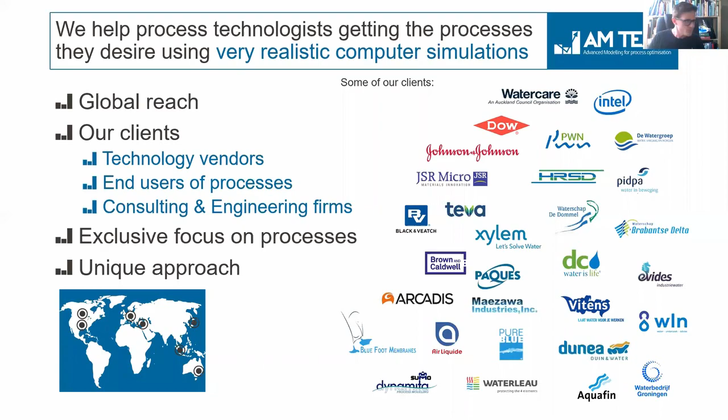You will for sure be familiar with some of the logos on this slide. Others are maybe more unknown, but you can see it's a whole variety of companies that we work with. You can also see on the little map in the left-hand corner that our customers are really from all over the world. We are actually serving people from 4 continents right now, so it's quite international because of the core focus on process simulation.

So we are very good at computational fluid dynamics, but really dedicated to the water industry or process side. And this really is quite unique.

Okay, so last slide on the company, I promised to really keep this short. We have around somewhat more than 50 customers right now, more than 80 projects finished in the meantime. Generally our customers are really happy. These are the average scores of our customers in the last 2 years from all the projects we have finished, and it's consistently close to 90 or above 90%, 9 out of 10, which is great to see.

But again, we have a huge amount of information on our website. So this was all on the introduction of AM Team.

My personal background is process technology, process modeling, drinking water and wastewater. I have worked on both, and I have a special specialism, a PhD in advanced oxidation processes for micropollutant removal. But generally it's physical, chemical, and biological wastewater and drinking water treatment.

What are the challenges you might face with process operation, design and scale up? If you look at the water or wastewater treatment process, or actually a treatment or production process in general, you have a lot of challenges as an engineer. Most of us here attending are engineers.

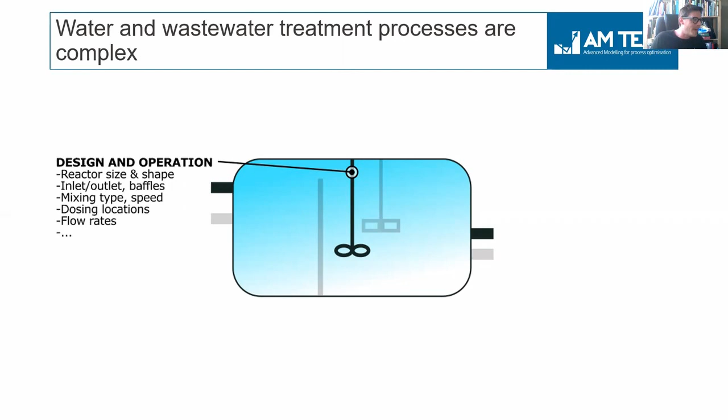But you have to make a lot of decisions: shape of reactors, impellers, and then you have water, you have bubbles, you have particles or solids, and then you have reactions. All of these things are actually combined in most of the water and wastewater treatment processes. Not all of them, but let's say it's a mixture of them, and it leads to highly complex processes.

And then we have combined with that dynamics - the demand or flow rates also change. So if we look at the operational side, a plant also varies in capacity. So there is a huge challenge here.

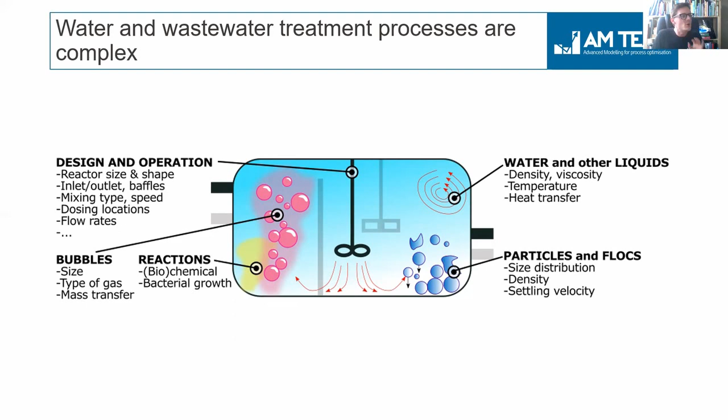And the question we want to actually solve with our company - and we have done a lot of cases on this for customers in the industry - is: what if we could reduce, complement, or replace real life experimenting and piloting with a very realistic process simulation? And I specifically mean computational fluid dynamics.

Well, why is this question very relevant today? And why is your attendance today a bit more relevant than, let's say, 10 years ago? Because CFD, or computational fluid dynamics, or modeling in general, has matured a lot in the last decade. Computers are very fast now and the models have been developed a lot. And there are, of course, also a lot of practical case examples that just show the benefits already.

This is a very relevant question. Why? Because if you are involved in practical testing, practical measuring, experimenting on site, piloting, you know that it's very time-taking, it is very laborious, it is sometimes stressful, and it costs a lot of money. I'm not saying that it is useless, and it can be very useful.

On the other hand, what I'm saying is, what if you could replace part of that, and in some cases almost all of it, by very realistic simulation?

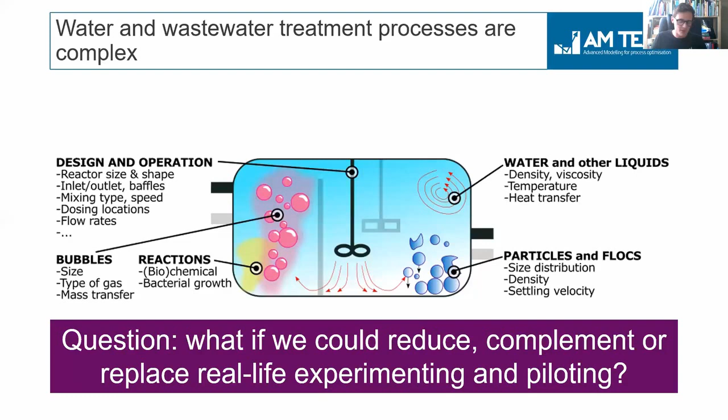Well, it's worth asking this question. It's really worth asking because it's about a lot of time and money.

So you have the 3D conversions of something. It can be oxidation, biological conversion, bacterial regrowth. These kinetics can be directly coupled with CFD, which gives a lot of insights. And then you have the process settings: viscosity, temperature, reactor dynamics, reactors, impellers, etc.

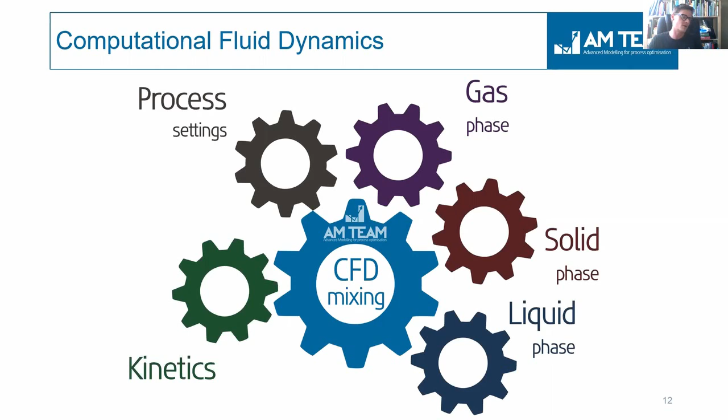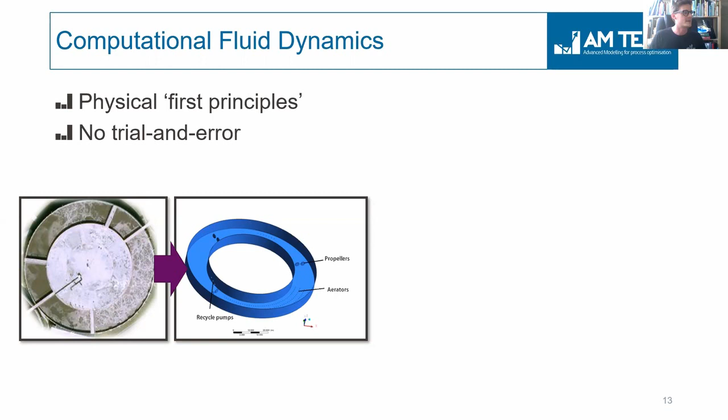So what is CFD? Well, you start from a real system, or a system you want to build, so it shouldn't be existing yet. The first step in CFD is you build a geometry, we call this the 3D geometry. It's somewhat more simple than a real CAD drawing, but it contains the real essential elements, like impellers, mixers, aerators if you have them, the real size of the system, the real flow rates, etc. So this is what we start to build, and then this is what we call the meshing. I'm just explaining on this one slide what CFD basically means.

We will not go into detail, but then we do the meshing, and you divide the whole domain. So if you, for example, have a reactor of 1 million liters or 1 million cubic meters, we have actually simulated big systems as well, and you divide it into 1 million cells. On average, the cell size is then 1 liter or 1 cubic meter. So it's high resolution modeling.

In each of these cells, you solve physical equations, and this leads to a very detailed hydrodynamic calculation, because all the cells will calculate mass balances, and you get very nice plots coming out, which most people are familiar with, the colorful drawings. So CFD, that's a bit the power.

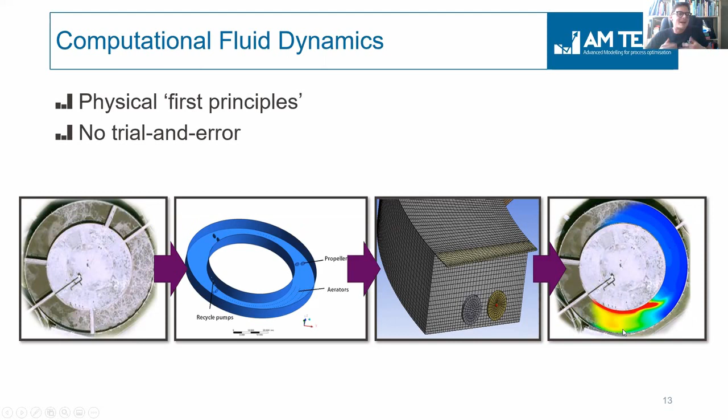It visualizes nicely, in this case for example, where the bubbles are. This red zone you see here is a concentration of bubbles in an aerated zone, or oxygen. And you have in the aerated zone other zones with fewer bubbles in this case. But it can also be velocity, velocity gradients, or different things. I will come back to that.

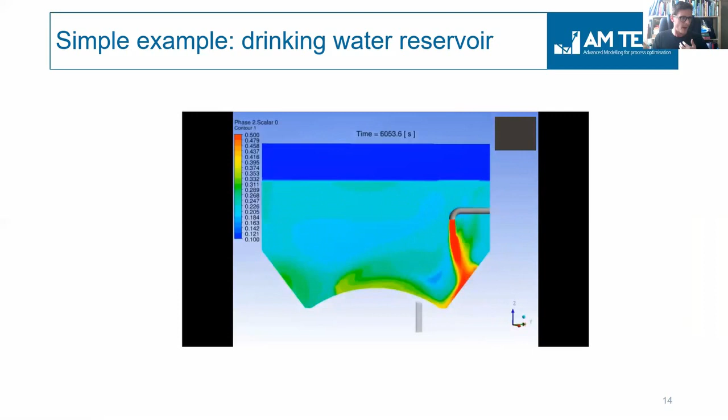A very simple example, this is from the drinking water field. You have a reservoir, we fill it with some drinking water. This is a drinking water storage system. You don't want the drinking water to be aging, because there is a potential risk of bacterial regrowth. So it's all about risk minimization.

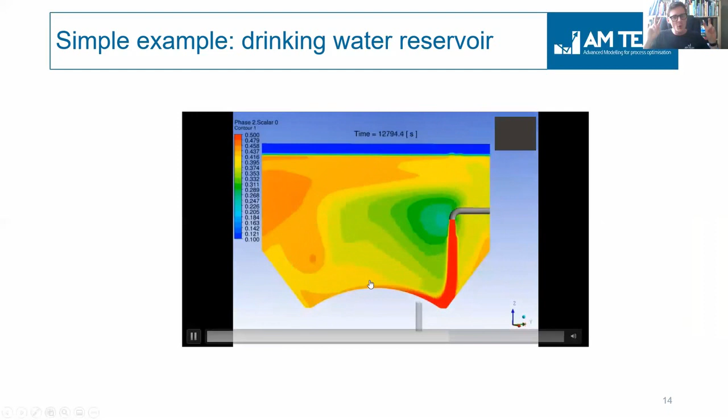You can nicely visualize how the newer water that comes in mixes with the older water. At the end, if you cut the water tower, this water reservoir, into slices, these are horizontal slices at different depths, you can see the green zones, which are actually the older water from the day before that is still in there and not completely mixed with the new water.

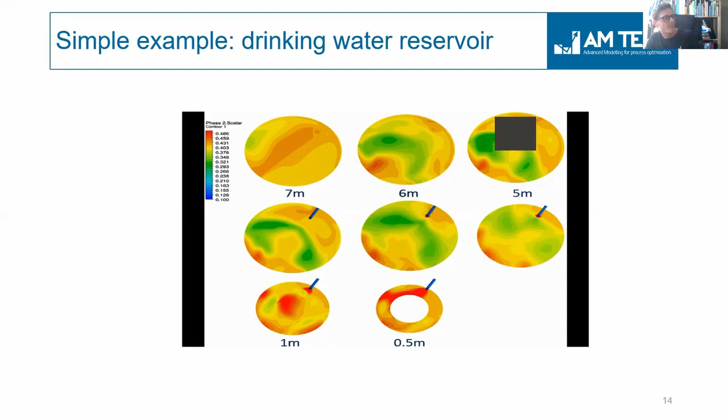Very simple system, but the value of CFD is that you can do what-if scenario testing. So what if, for example, in this system we would make this pipe a bit longer? What if we put it a bit deeper? Would it improve the system? But you don't have to do this in practice, because it's not feasible in many cases at full scale, and secondly it costs you a lot of money and you still don't know if it will work.

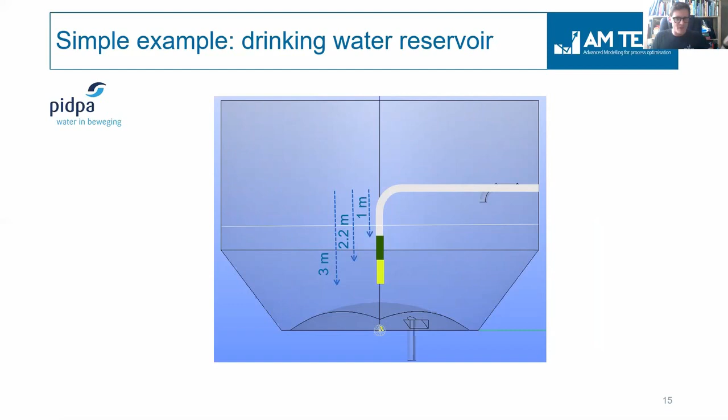So you can first simulate it, and let's simulate it. Then you can see, for example, that the new design is much better. This is the new design with a central filling, it's just changing a filling pipe. And then you can actually see, if you look at

the old versus new water ratio in the reservoir. The blue line is what you would have if the water tower were completely mixed, just imagine it's an ideally mixed system, everything perfectly mixed. What you can see is that the original design had much more newer water at the bottom, because the red curve deviates a lot from the blue one, negatively.

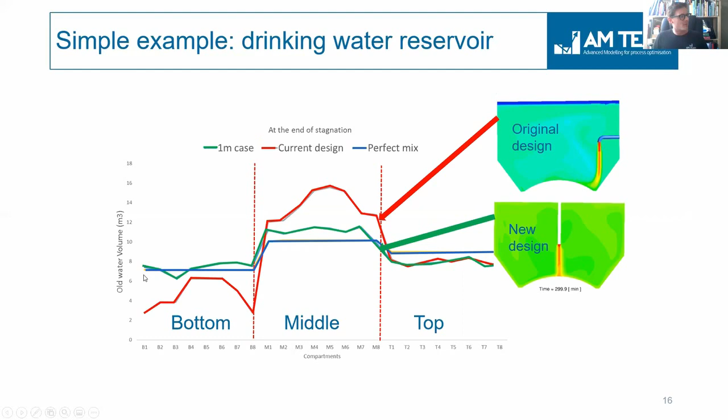In the middle of the water reservoir, you had a lot more older water packages, and then at the top zones, more or less 50-50.

But if you optimize it, you come much closer to the optimal system. So what can you actually change? You can change any operational variable or any design variable of your system, and this is what makes it very attractive.

Coming back to the question, what if you could replace physical testing? Here you have the testing freedom that simulation offers. You can test mixers, mixer types, impeller speed, how many mixers, how many propellers, how many aeration devices, where you put the inlets, what is the perfect reactor shape, where do you put aerators, what is the impact of viscosity, what is the impact of many other things.

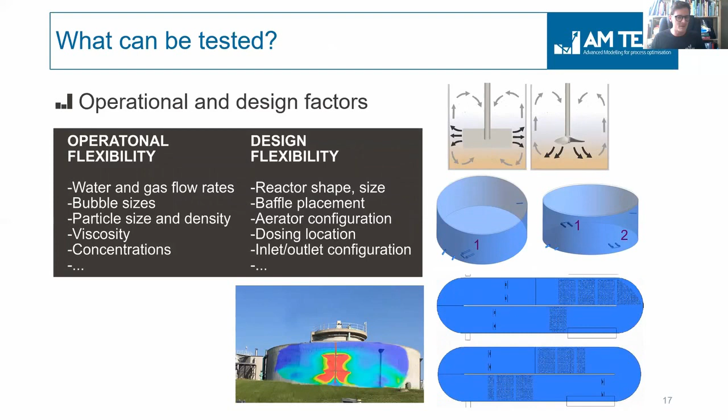So these things, baffles, dosing locations of chemicals, you can vary all of these to answer a lot of questions. This is what you actually put in. What comes out is most people are only familiar with mixing patterns and some velocities.

We have used all of these variables across our projects, not all together in one project, but we have used all of them. It means you can inject a virtual tracer at your inlet and look how it distributes in the system, giving you a very direct quantification of the mixing efficiency.

People in the drinking water company want to avoid the solids coming out again. They want them to settle.

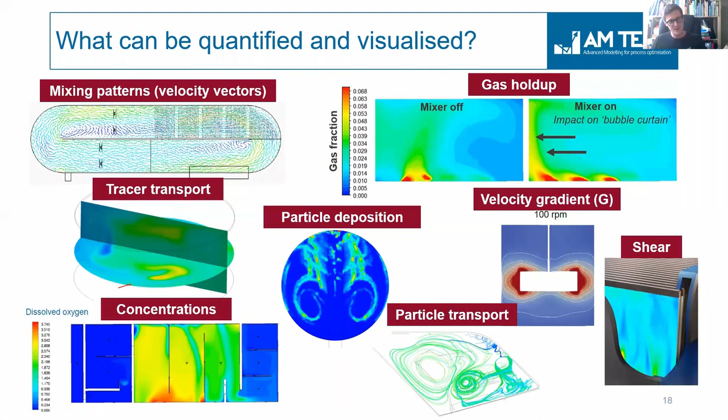You can look at velocity gradients. I'm thinking about coagulation, flocculation. You can look at shear distributions, for instance in membrane filtration, so shear on a membrane surface, etc.

There are actually four reasons. We have defined four core reasons people use CFD. I already mentioned it a bit: to save costs, to save time, and of course to end up with the optimal process performance.

And also, if you are a technologist, the fact that you are attending this webinar means you want to learn more about it, because you're probably interested in really understanding what's going on in your process. Most process people have a passion for process. They really want to understand, and if you have a better understanding, you also increase your confidence a lot.

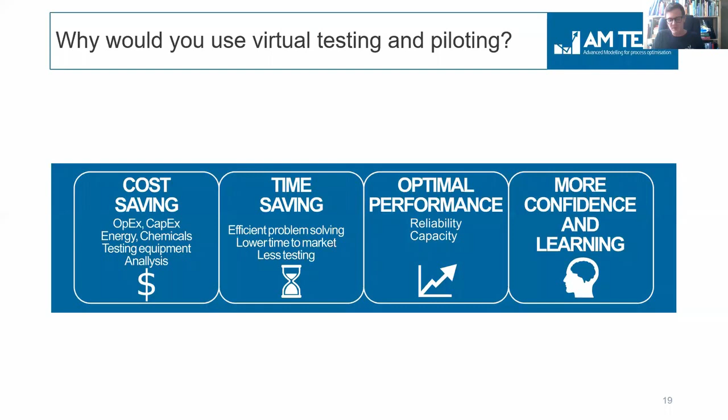So this fourth reason is also a very important one. Let's now go to the most interesting part of the webinar, the applications. I want to mention that we only selected some cases—it's a lot of cases, but we have to make a selection, and the variety is enormous.

So the blue ones, which you see on the slide, are more wastewater related, and the purple ones are more drinking water related. But there are a lot more examples.

I'm just showing this slide because you can see it's about aeration processes, membranes, solids, for example anaerobic digestion. It's about small systems, large systems, fluidized beds, sludge blankets, crystallizers, etc. So it's a huge variety of systems.

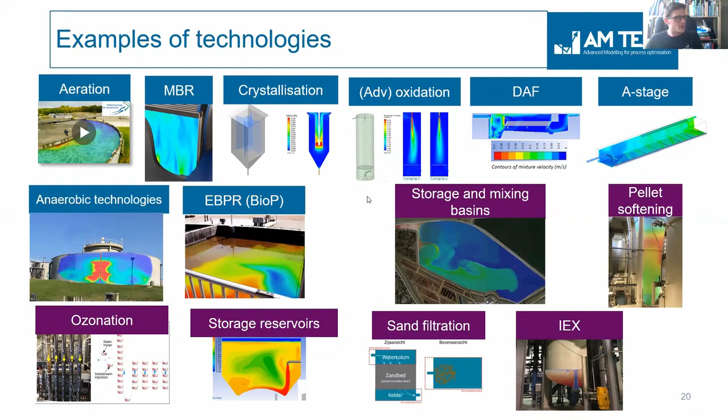Okay, let's go to the case examples. The first example is a scale-up example. We will be talking about an MBR in this case, a membrane bioreactor. Even if you're not working with MBRs, just look at the scale-up.

So what we are doing here is using computational fluid dynamics to accelerate the scale-up of a new technology, while saving a lot of pilot tests. We try to save a lot of pilot tests here by replacing it with very realistic process simulation.

So we had a Japanese customer. They actually developed this new MBR. I will not go too much into detail.

It's a one compartment MBR, and the volume actually varies throughout time because they fill only once. They fill it with wastewater, so here it's full. And then the permeate starts being drawn, and the air goes over the baffle like this. The aerator is at the bottom, air is going over the membrane, and the air also circulates right like this. The whole reactor volume is aerobic, oxygen everywhere.

But suddenly, at a certain point in time, the water level reaches the baffle, and so the oxygen cannot go over the baffle anymore. So this outer zone, this outer shell of the reactor turns anoxic because the activated sludge will consume all of the oxygen. So they play with gradients in one reactor.

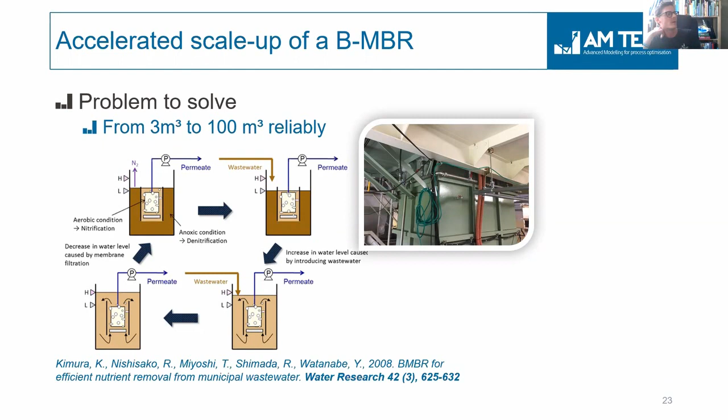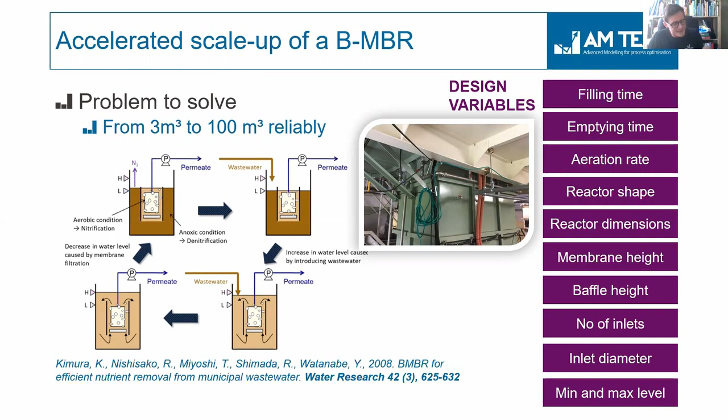Then you have the question, what will we do? Will we build extra pilots? But it's not so straightforward because you have so many degrees of freedom in your design: cycles, filling time, emptying time, the rate of aeration, the shape of the reactor, the number of inlets, inlet diameter, baffles, the height of the membranes, etc. If you want to test all of these things during piloting, it's practically infeasible. It will take too much time, and you will have to build a lot of pilots. And still, at the end of the road, you're still not sure about the best design.

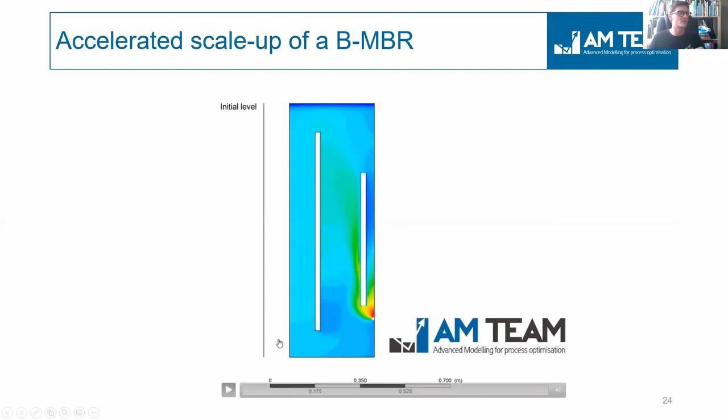So what we did is actually build a very realistic model. It includes the biokinetic conversions, so we will directly calculate permeate quality. It includes the bubbles, it includes the high viscosity of a lot of sludge in an MBR because these sludge levels are higher. This is a conceptual simulation.

So the bubbles go up over the baffle. It reaches the baffle here, and the oxygen goes away at the left side. Now you see the depletion happening. So you see that's a transient, which we call a dynamic CFD simulation, very realistic.

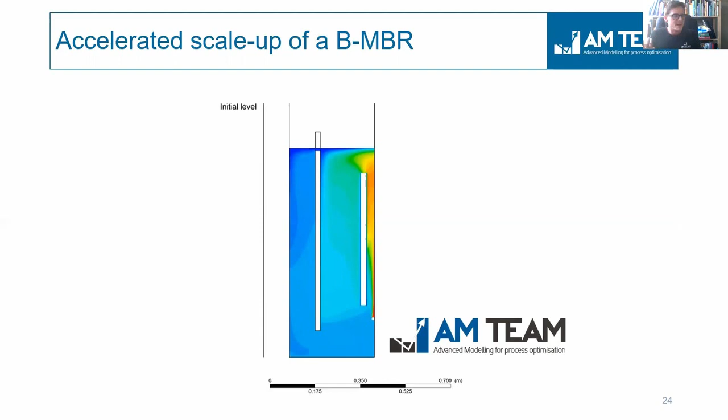And in the end, we scale it up via the computer actually, and then we start virtually designing the ideal full scale without having built it in practice. So what we do here on this right graph is comparing the permeate quality. Of course you want the BOD, ammonia, nitrates to be as low as possible. So we are comparing the performance of 5 different full-scale designs. All of them have the same treatment capacity, but only one of them is the best performing one.

And the only thing we changed here is the aforementioned factors like membrane height, baffles, shape of the reactor, etc. At the left, you can actually see that you have local zones, this is the ammonia profile at one specific time in the cycle. So it's just a snapshot.

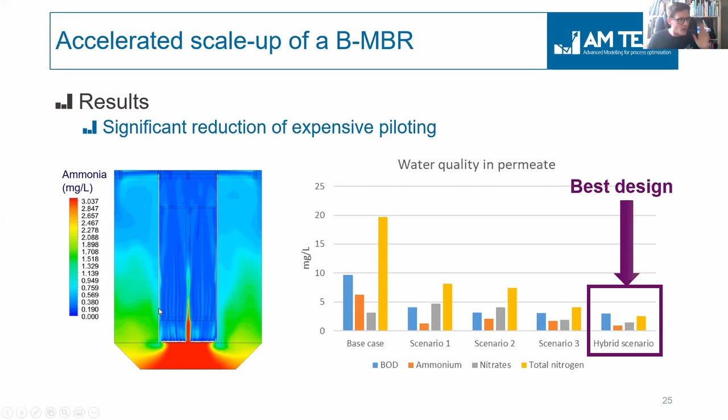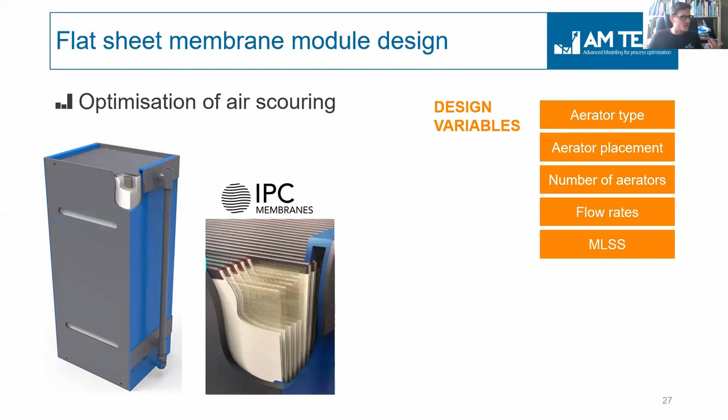We had a Belgian customer here designing new flat sheet modules, the IPC membranes. What you want here is equal bubble distribution over each of the flat sheets, so that none of these membranes starts fouling. Over one sheet, you want an equal shear distribution, so the ideal membrane would be one color, if this represents shear force. And then across the module, you also want every sheet to be scoured equally. Again, you can choose with aerators, the shape, the design. You have a lot of design variables, let's say.

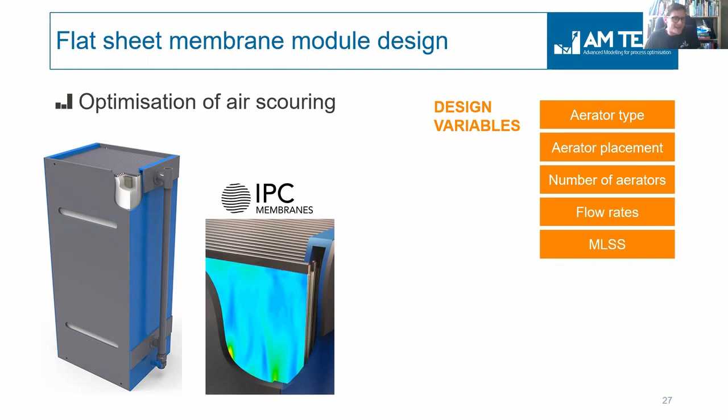So we did a lot of CFD simulations here for this customer, again without them having to test it in the lab, in their facilities. So we tested, for example, fine bubble versus coarse bubble aeration. You can see that coarse bubble aeration gave much more shear on some of the sheets.

Each individual curve here is the shear distribution over the membrane surface of one membrane sheet. If there are 30 sheets in one module, you have around 30 curves here. Ideally, the curve is vertical, because you have the same shear across one sheet, and ideally every curve is the same, so you have the same membrane shear across the whole module. But you can see in reality it's not like that. In the coarse bubble aeration case, it's really a disaster, because some of the membranes have all the shear, which is, for example, this right one, and then you have some membranes without any shear.

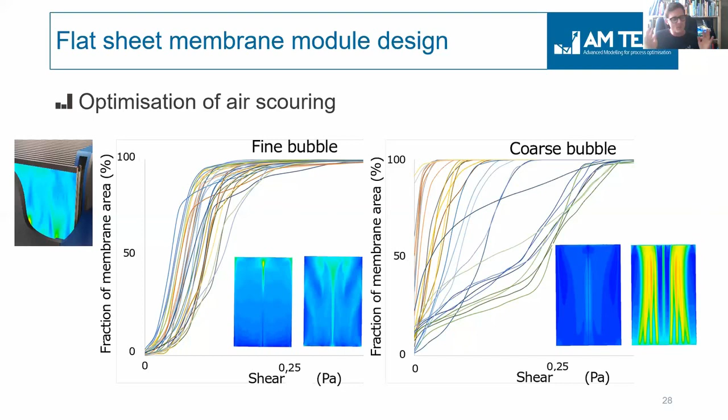They hardly see any bubbles. With fine bubble, you have a little bit less shear, but it's much more average. This was really the way to go in this case.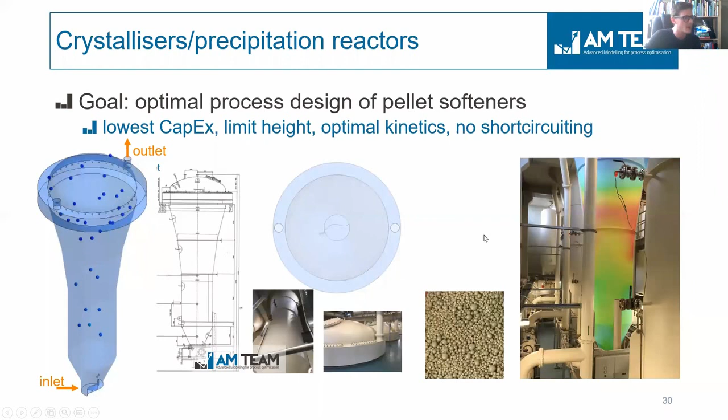A lot of questions. And again, it's a scale that you will not easily pilot at, because these reactors, in this case, are 12 to 15 meters of height. It costs a lot of money only in stainless steel, without even operating them. So you will preferably not make too many mistakes in your design.

Again, you can build a CFD model. I'm just showing this case because not many people realize these things can be simulated today. Most people are only familiar with mixing or aeration applications. So you can include the solids. We have actually virtually filled this reactor with granules of different sizes, ranging from 0.25 millimeters to 2 millimeters, so it's a whole distribution in density and size. We add them to one system and look at the classes separately.

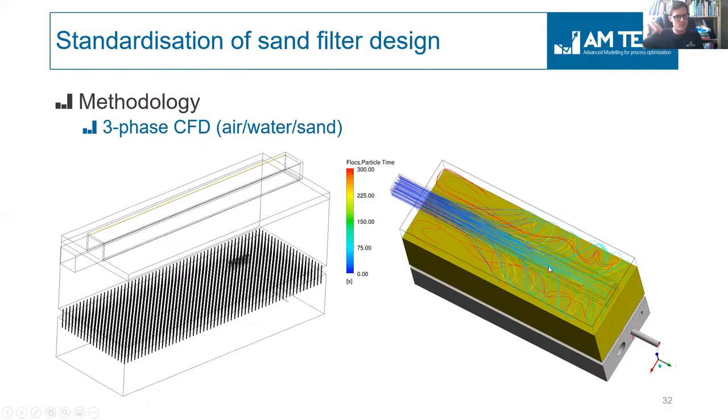Here you can actually look at the filtration cycle. Where do particles preferably settle? Is the particle distribution over the sand bed homogeneous? This is the simulation I was talking about, one of the oldest technologies being simulated with a very modern simulation tool, and this is why I like this case. What you can see here is the nozzles at the bottom. We are looking at a 3D simulation of a sand filter, a square one in this case.

We are looking at one slice vertically, and the nozzles, which will backflush, are at the bottom. We start backflushing, and you see the expansion of the sand bed. We start with backwashing with only water, then we add air, and you see the whole turbulence changing. This is strictly speaking a three-phase simulation, which is globally unique. We have seen no other case where this has been done, but you can see the level of reality is really cool.

We are now looking, with our customer Vitens, a Dutch utility, at can we standardize the designs? For example, can we just select one type of design that really performs well, and nozzle placement, gutter placement, aspect ratios, how do we introduce the water, what is the outlet gutter design, such things. So these are things we are looking at.

So you can even go to dual or multi-layer filtration here. I'm just showing this example because you can today go very advanced in CFD. And coming back to the membrane spacer, I would say this is an equally heavy CFD simulation, and we are still doing it, but of course we use cloud computing here. We put it on the cloud with a lot of computers, but again, this is all available now.

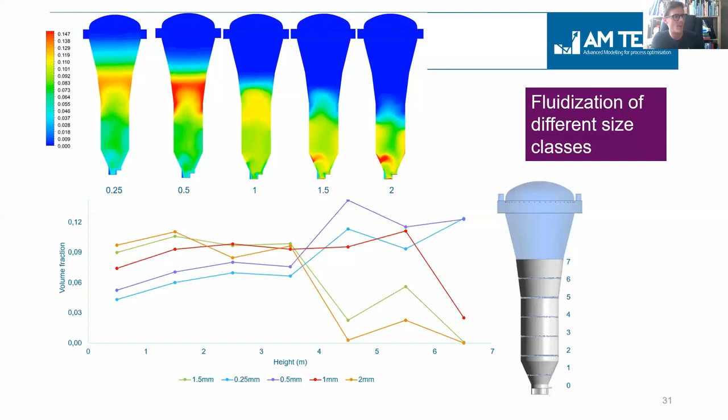I hope it answers the question. If not, the person having asked that question can really ask a second one if you want. If it's not clear, please ask again.

Maybe another question that is quite a curiosity more than a specific question for everyone: what software do we work with? And is there any other software, other than COMSOL or Fluent, useful for the water industry? And how much do these softwares have to be customized?

Good question. Well, most of the software is generic, meaning it's used across disciplines. For example, ANSYS Fluent is used in aerospace, combustion, and a lot of other industries, process industry, water industry. And then you have others, Flow 3D, Star CCM which I think is Siemens, and then we have COMSOL, and then we have OpenFOAM, which is the open source package. I think most of them are quite generic.

I think most of them have very good applicability in the water industry, but we mainly work in ANSYS Fluent as a company, because we have good experience with that. Also integrating the kinetics goes very fast. Of course, given the fact that it's a generic software, you have to tailor it a bit to your case.

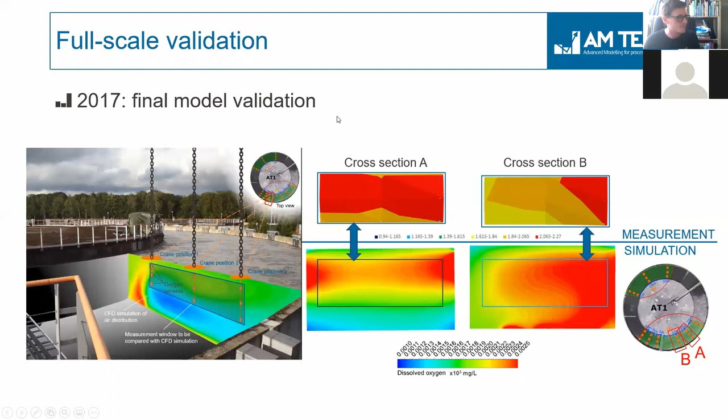Are many systems working well? Luckily, yes. I'm just showing what can be done, and in some cases, it is really a problem. So this was the unique validation case. It's extensively described on our website - we have a whole article on this.

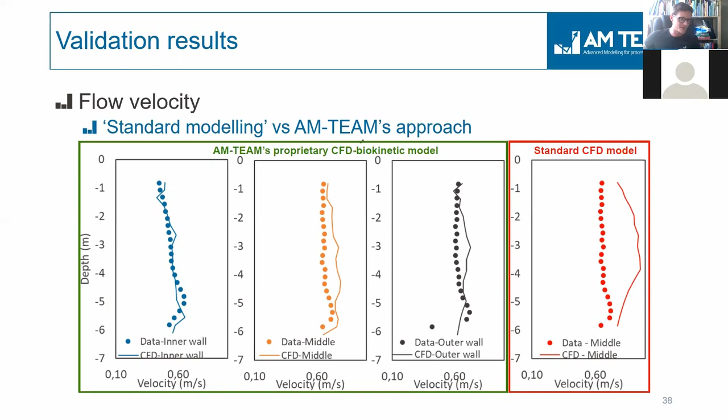We have worked a lot on this model over the last 6, 7 years. It's a very well-established wastewater model that is very accurate. If you model it as clean water, which some people do, you typically have much less accuracy. If you have much higher accuracy and confidence, you will take much more important decisions based on CFD, and this is where the whole value lies.

In this specific case, we could actually directly switch off 6 mixers. It was a rather big plant, 750,000 population equivalent, already towards the bigger plants. If you can switch off 6 mixers in such a plant, it's a lot of money and a lot of energy saving.

We could also potentially reduce nitrate in the effluent. Why? Because the local dissolved oxygen concentration goes up. It sticks near the inner wall, and a bit downstream you have the intake to the anoxic zone. If you take in much more oxygen in your anoxic zone, you have less denitrification and nitrates go up. So these were all factors we looked at.

It was relevant because they were retrofitting the plant, so the aerators were going to be replaced anyway. The question the plant gave us was: can we now design it very properly, or at least save some energy and also avoid this nitrate issue?

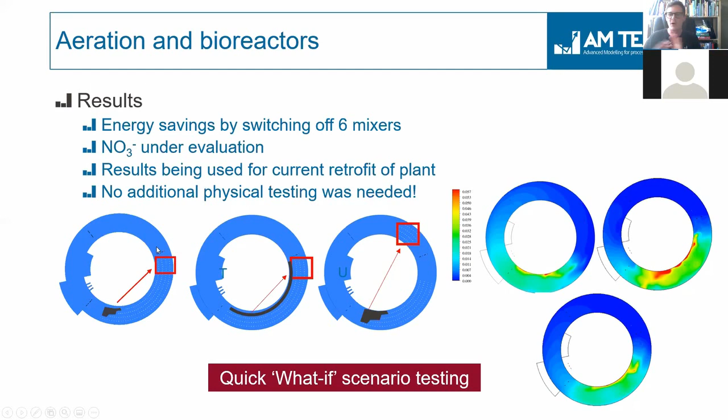So we did a lot of what-if scenario testing without testing on site. We actually virtually put aerators at different spots. We switched off mixers, and for example, switching off this pair of mixers versus the other one or the third one, they all had a huge impact and a different impact. CFD will give you all these insights, of course.

Let's come to this question: when to validate? How valid are your CFD models? Because your story looks so nice, how reliable are these things? Do you even validate? A very important question if you're a practitioner.

I can say that in 80% of the cases we do not validate. And then the question remains, okay, which are the remaining 20% of the cases then?

When to validate? Either the customer really insists and asks for it. Often it's people using CFD for the first time to take a decision, and they just want to see the data fit their specific plant. If the customer really asks for it, we will do it, because then the confidence goes up, and if the confidence goes up, the value of the project goes up.

Scale-up projects where a lot of stakes are on the game, of course. A new model - we develop a lot of new models. If we developed a new model, we apply it for the first time at full scale, so we will also validate it then. These 80% of cases are ones we've done the 10th, 11th, 15th time at full scale - we don't need to validate anymore because we've proven over and over that it works.

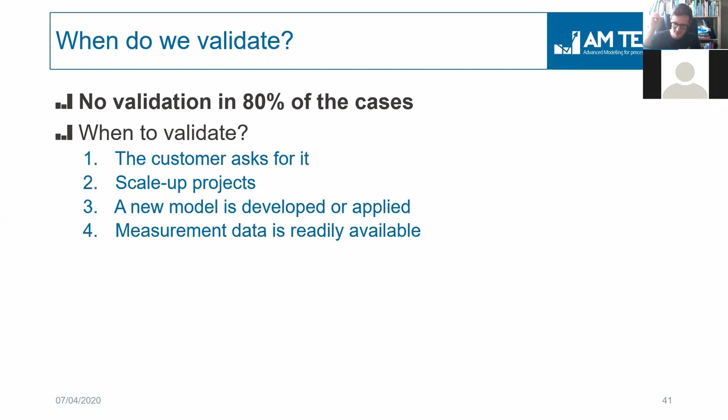Or in the fourth scenario, the measurement data is readily available. Sometimes there's really a lot of good data readily available, and then we might also validate. Very important, because if you look at practical application of CFD, it is really practical if you don't have to collect new, additional data.

Scale-up design of new systems - we also use the coupling with the kinetics there. So we have a lot of these projects going on. It's quite unique. We are actually the only company worldwide offering this service of coupling biokinetics with CFD on a routine basis. So a lot is possible.

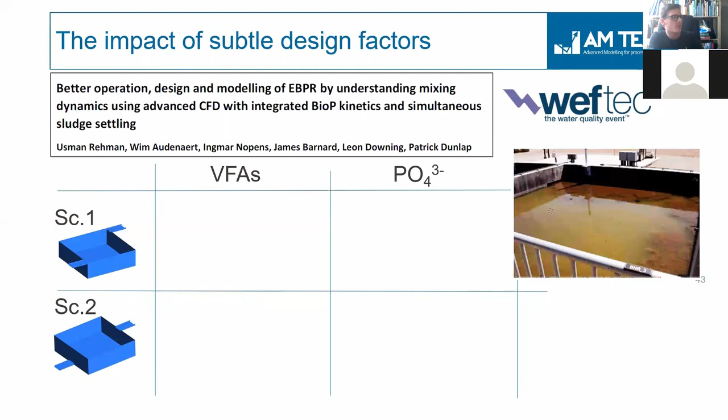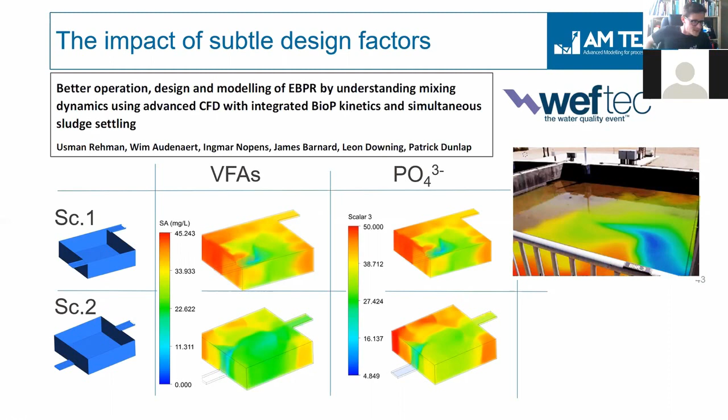Another example - this is coupling with kinetics in the US. In the US, people now do a lot of sludge fermentation to produce VFAs, volatile fatty acids, but it's also valid for fermenters looking at bioplastics formation potential and other things. If you couple this with kinetics, you can see that local concentrations in one reactor have a huge spread - local VFAs can vary a lot. And then if you do a simple modification of the inlet, putting it at the middle instead of the right side, it gives a huge impact on effluent quality. It's a nice illustration of how sensitive design is to these things.

I will come back to Giacomo. Are there additional questions, Giacomo? Yeah, actually there was a question we skipped before from Osama Amdani - I'm sorry for the pronunciation, tried my best.

The question is, can CFD show channeling in sand filter design and how to avoid it during normal operation? I think this relates to the filtration phase, so I'll answer from that perspective - if I'm incorrect, let me know in the Q&A. What we currently look at is just the particle deposition on top of the sand mat. What we are not currently doing is changing the local permeability due to local fouling with particles. It's possible, but we don't model the channeling yet.

What we do model is how uneven the distribution of solids is on your sand bed. If you start with an uneven distribution, it will lead to channeling, and to a more uneven load of your sand bed in the longer term. So the question is, why wouldn't you start with a homogeneous load of particles in the first place - design for that already. This is where we are right now. If you want to look at that specific question, you need a much more sophisticated model.

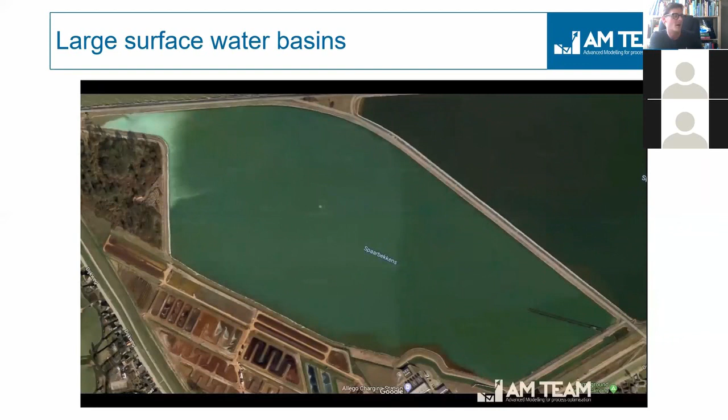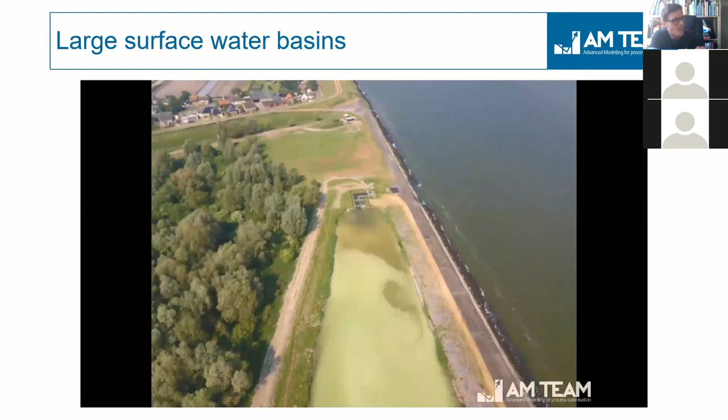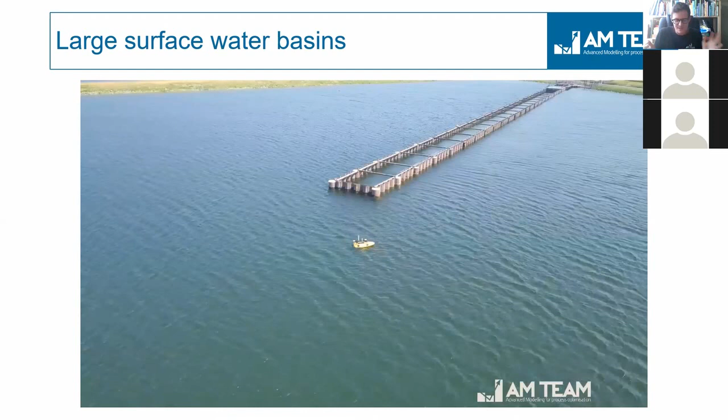What you can see is that the flow comes in and you actually have a short circuit - the flow goes directly in one direction right after entering the basin. This is an ADCP measurement, by the way, taken with a boat with an ADCP below it. I wanted to show this case because it demonstrates that CFD can be used at this huge scale, and in fact the simulation doesn't take longer - it's an identical approach, your mesh size is maybe the same, it's just a huge system you model.

The simulation also predicts this short circuiting to the right - the flow comes in and goes directly to the right. You only effectively use about 40% of your basin volume, while everybody would hope that this basin is better mixed with less short circuit, so the inlet goes to the outlet rather directly - it's a pity for the volume of the basin.

What impacts this a lot is your basin geometry, but also where you put the aeration. In such basins they typically put aerators - it looks very tiny in this picture, this little white ball you see, but actually the aeration is quite significant because the scale is big. It causes a lot of mixing, but it also causes the short circuit. Can you optimize this? For sure. Can you optimize the aeration flow rate? For sure, and you can test it with CFD.

By the way, in this case we have validated this, because that specific case was the first time we applied this model. So we validated it. We have a lot of similar cases now in the meantime where we didn't validate, but you can see, again, the same plots.

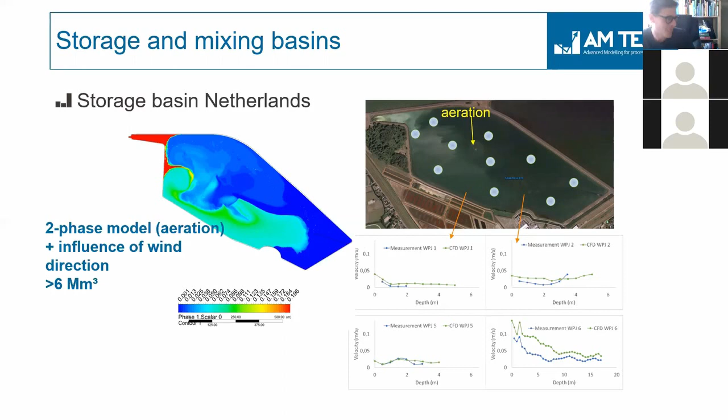This is what I'm showing last. Why? Because I started with things people would be less familiar with. These things people are more familiar with—flow splitting, flow distribution, typical CFD cases. I'm showing them because they are of course very valuable.

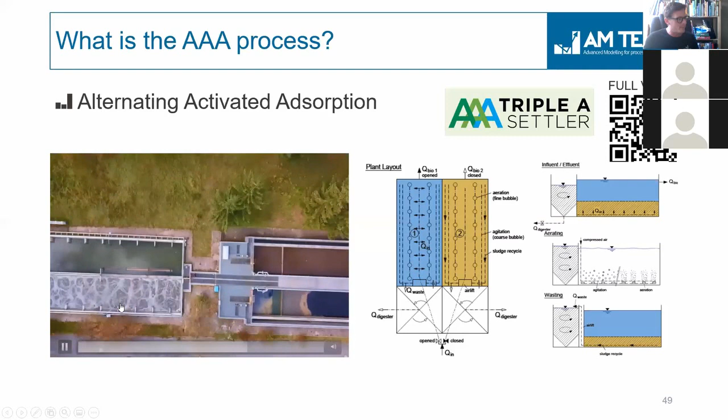In this case, this was a new technology that relied on a flow distribution over the bottom. It's an A-stage process, so you have a sludge blanket—I won't go into detail, it's on the website. The key point is you distribute your influent with a main pipe with lateral pipes, so you want your influent to go into your reactor very homogeneously.

Why? Because otherwise your influent isn't well distributed—it lowers the kinetics. Secondly, you could have a flush out or wash out of sludge, which you also don't want. In the case they designed initially, you had a huge dead zone, a zone that hardly got any influent, and on the opposite side you got much more influent than needed.

The problem here was that the system was already built and already in operation. Of course you can still do CFD to optimize it, but ideally you use CFD upfront and then build the installation. If you have to empty a full-scale bioreactor it costs a lot of time and money—just count the operator hours for cleaning, emptying, and recommissioning.

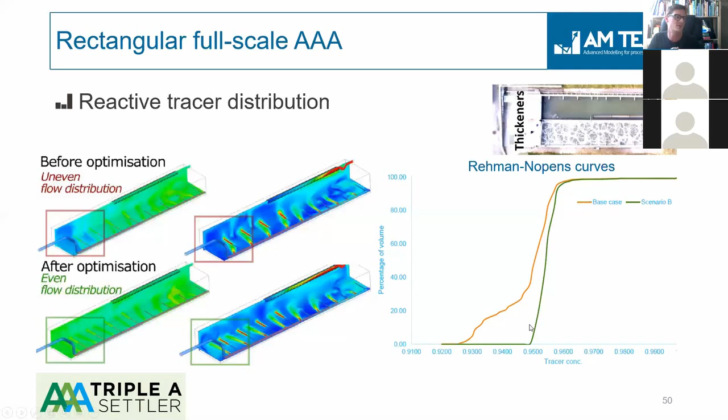Anyway, we changed some small things in the pipes—really simple, not rocket science, but it caused the system to perform really well. You can also see this in what we call the Rehman-Nopens curves, which are plots similar to the shear distribution plots, but here we plot tracer concentration instead. In the optimized case it's almost vertical, so a very homogeneous concentration, while in the non-optimized case you have a huge dead zone.

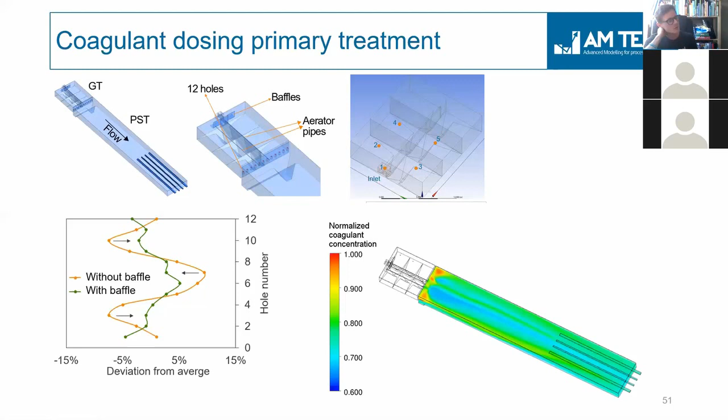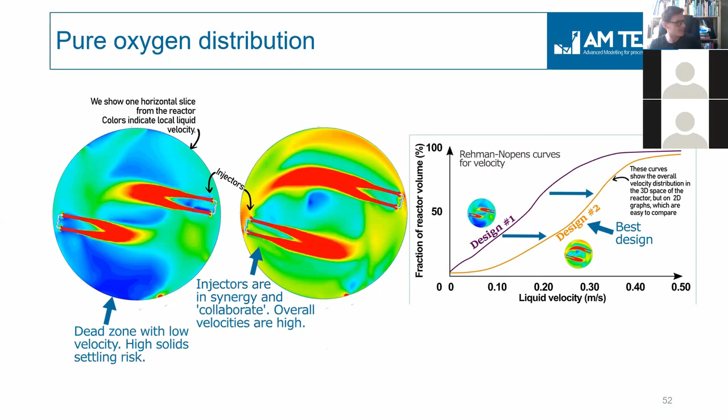And then you have dynamic influent flow, so how do you control the valves? Very straightforward hydraulic CFD modeling, but high value, I would say, certainly in the design phase.

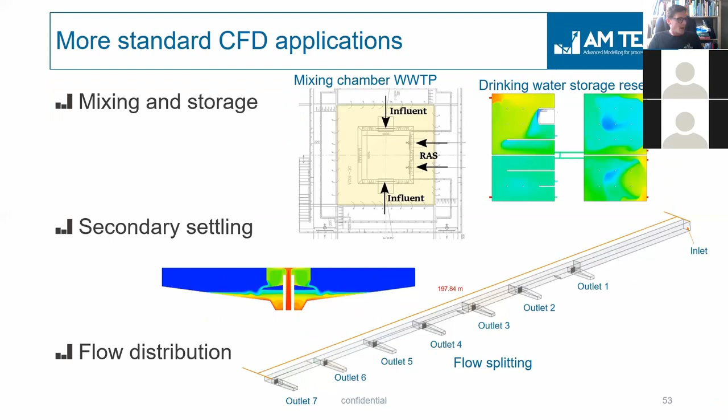Okay, so for more questions, it's either me or Giacomo. Giacomo is also actively working on this.

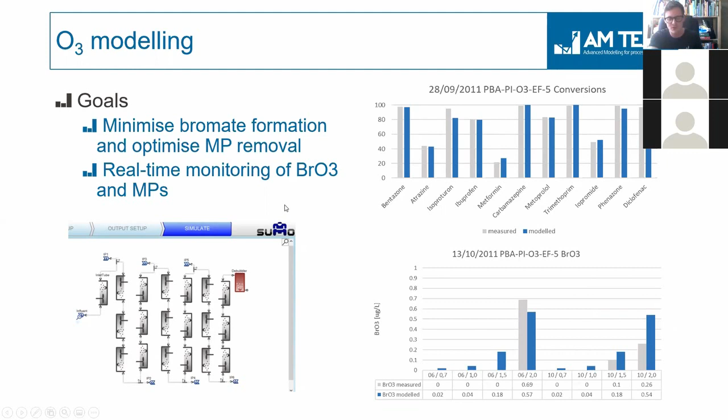Okay, good. Conclusions. Well, Giacomo, I will first go to you again to see if there are remaining questions. So maybe this time I will bring a couple of questions. Daria, yeah, the first question from Francesco Spanani: he asked if the CFD model could be applied to reactors with aerobic granular biomass.

Yeah, good question. It's not similar, of course, but it's a similar principle to the pellet softener reactor I have shown. So yes, aerobic granular sludge or anaerobic granular sludge can be modeled with the same methodology. We have a couple of examples running on that, but unfortunately I'm not allowed to show any of that information because it's confidential. But yes, it can be modeled, and it's a very relevant question, because with upflow designs we have literally seen people struggling with inlet construction for months to years, while you could really have solved this with CFD. It's a very good example.

So you can include the granular sludge with a specific density. For example, in anaerobic technologies, we are even looking at different densities, because if you have anaerobic treatment on pulp and paper wastewater, or on food wastewater, the density of your granules is different because of calcium and things like that. So all of these things can be assessed.